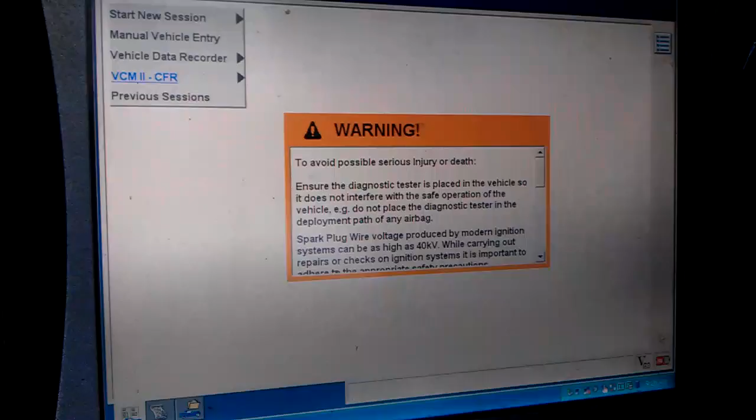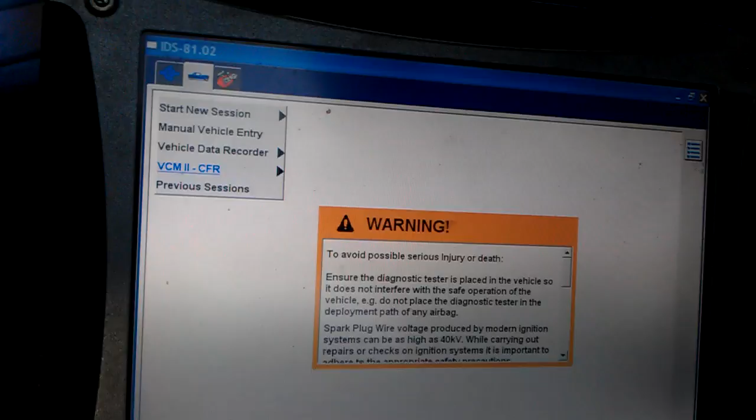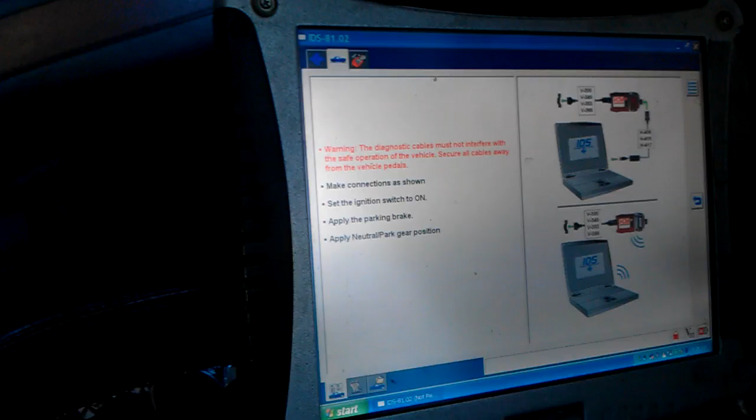Alright fellas, this is a video about how to check FICM power and see if you actually got a FICM going out. So first thing we do is turn the key to the on position and get it set up for the session. So it takes a few minutes. Usually when I do an inspection, I always check and make sure the FICM relay is alright.

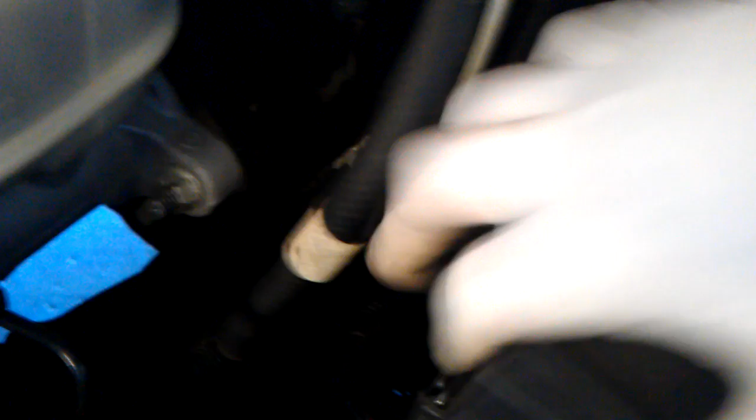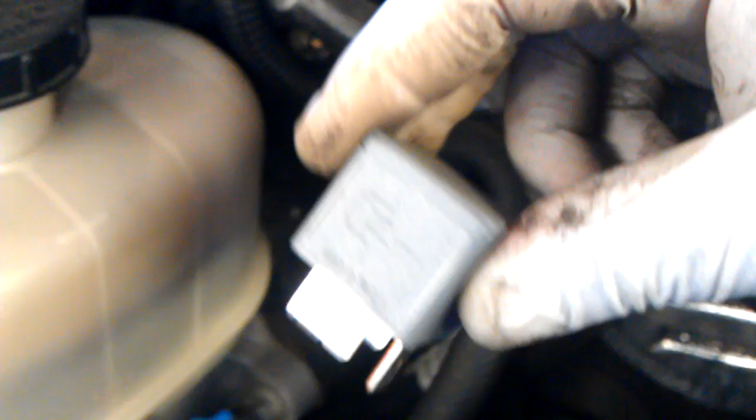Alright. Make sure these are alright. Wow, they're on there today. Yeah. What I'm looking for is some brown spots, like it's been overheated. But I'm not seeing anything at all, so it looked good. Here's another one. Alright, we want to check those, make sure those are alright. That could be your problem too, having low voltage. So, alright.

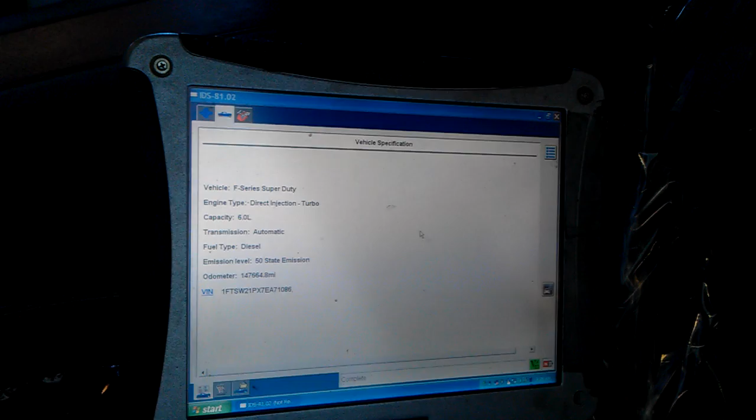So while that's hooking up, of course there's another session of it. This should be a pretty good video right here. If you don't have a scan tool, it's pretty hard to determine your FICM power and all that stuff. This is the IDS, what Ford is promoting for their vehicles. So, alright, so just check codes. That's the first thing I always do, is check codes. Powertrain, engine.

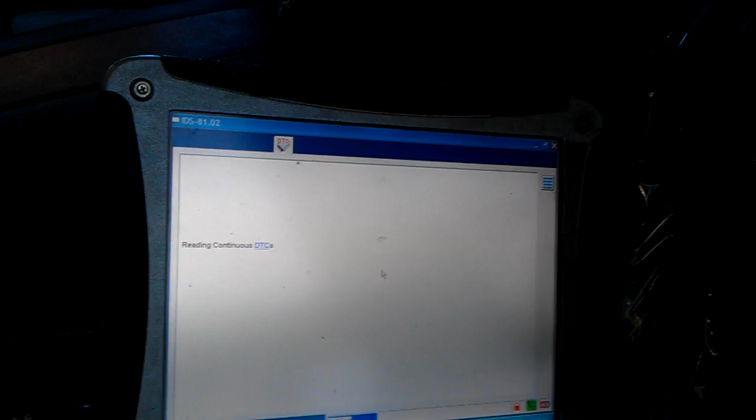Yeah, it's a nice cold morning this morning. It rained last night, so it's nice and fresh, crisp air.

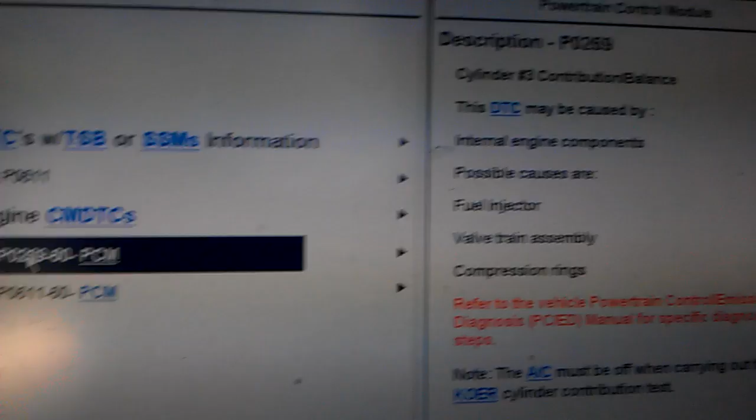Alright, so we have two codes. 611 is the notorious one for FICM, saying that the battery voltage is low. And the other one, 269, I think it's cylinder 3 contribution balance. Alright. So the next thing, I go to the toolbox, and then we're going to do the data logger, which shows all the PIDs. Go here, engine. As soon as I start it up, you'll know that it's misfiring and all that other stuff.

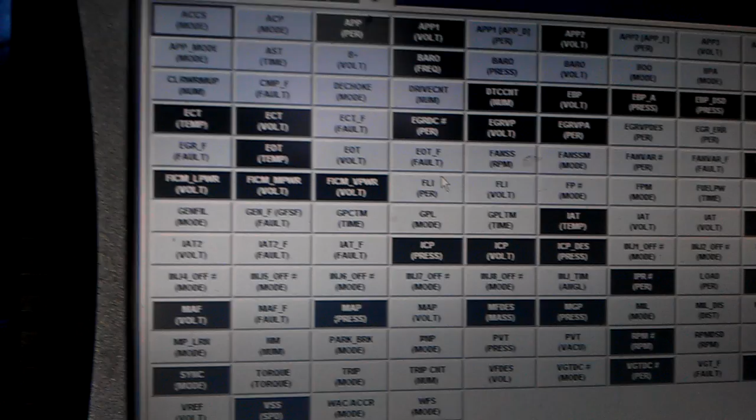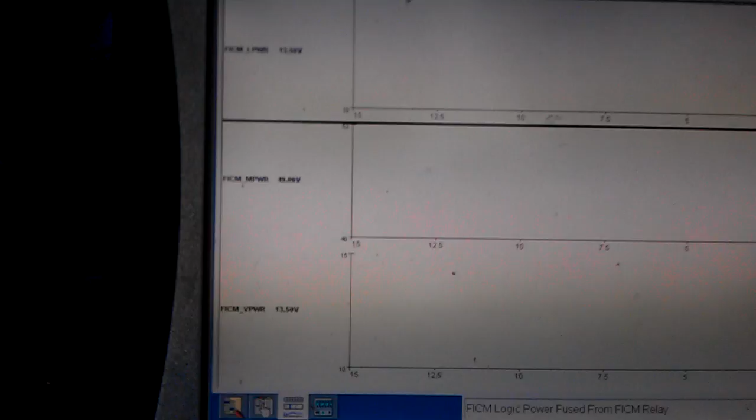Alright, here's all the PIDs. I'm sorry about the shaky video, I'm trying to do it one-handed. The ones that are black are already selected, so those are pre-selected every time you hook up a vehicle. So you usually clear them all. Then I just go to FICM. L power, M power, and V power. So click on that. It should give me the M power, 48.50. Alright, 13. So looking good.

Alright, let's see if I can do this one-handed. Alright, I want to start it up. Look at the M power. Dropping below 34 volts, 33. That's a good indication that the DC to DC converter is just junk. Time for a new FICM, going down to 30. It could stall out, but it'll probably just run for a little while.

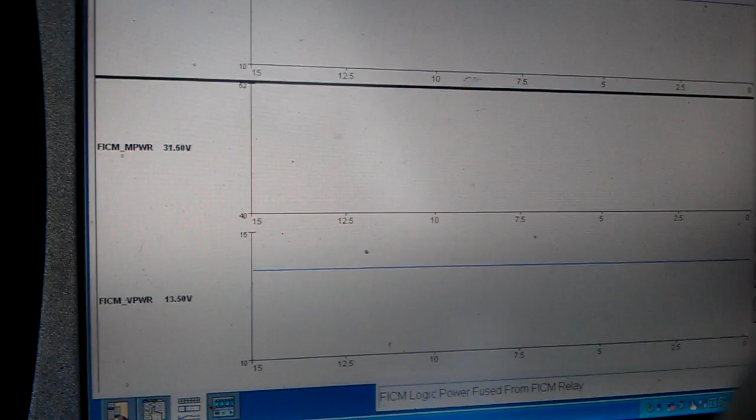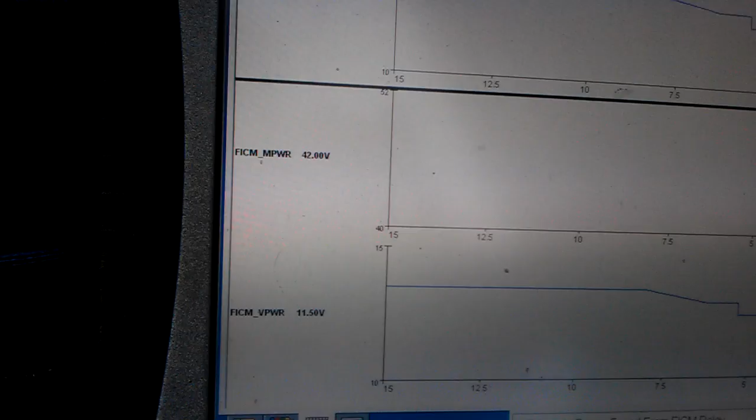Alright, so that's a good indication that a FICM's bad. And you can see the voltage just going right back up again. See, it wants to come back up. So that's a good indication the FICM is just completely gone. I get a lot of questions about, what about if it's at 45 volts or 46? It's perfect. Don't even worry about that.

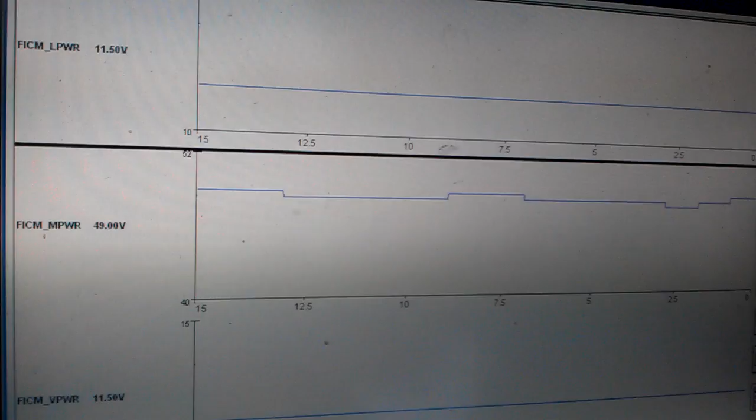Once it starts going below 45, like what you see here, it's definitely bad. I've seen them where they're 39 volts and it won't run rough like this one does. So there's numerous types of concerns out there, even though the FICM is bad. It's just the way it is. So now it's up to 49. So this thing has just had its time and it's ready to go.

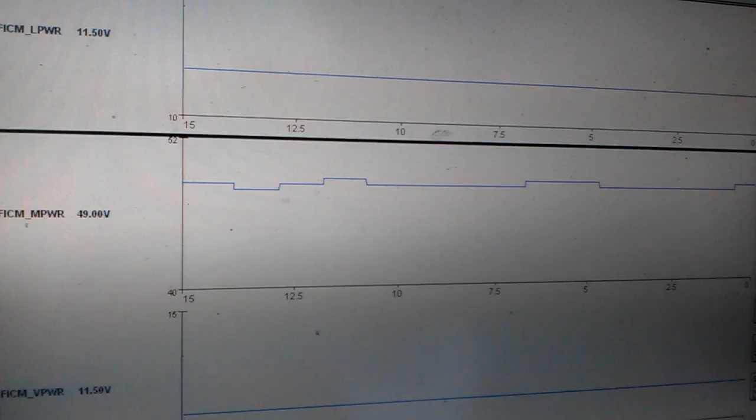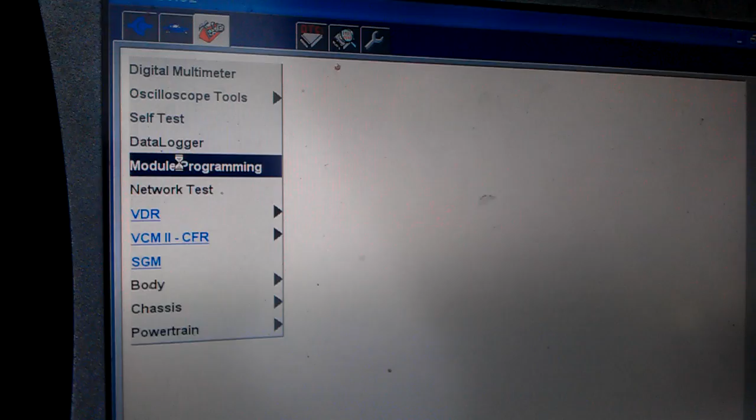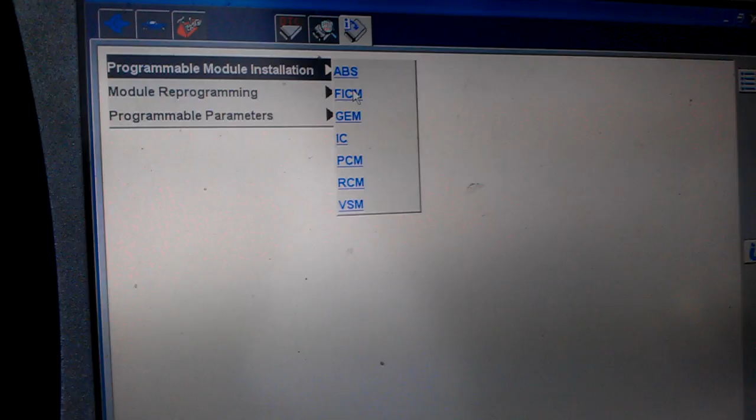So on the scan tool, once I get the okay to replace the FICM, then I go to module reprogramming. Right there. Oh, excuse me. Installation. Let's see, right there, FICM, and then it tells you to follow certain steps, but I won't do that until I get the okay. So other than that, that's pretty much it. How to diagnose a FICM.

I have seen the relays go bad and cause the same exact concern. That's the first thing I always check. And during the reprogramming, you're supposed to remove them. Also, there's a number 10 fuse, which is this one right here. Sometimes those blow. And I had a horror story about a month ago. There was a FICM that was actually cutting out, and it said no voltage. It was like a P0 something, like a 6 something, a different code.

And every time I banged on this, it shut off, and I was trying to figure it out. I thought maybe it was a loose pin on the relay or something like that. So I checked with the test light on both ends of the fuse, and there's power. But that doesn't mean that it's actually making contact. So I removed the fuse, and the fuse was actually broken, not blown, but broken. Every time I pressed on it, it made contact, so it looked like I had power at all times. So when I hit it or banged on it, it stalled out.

It took me about an hour, but you know, just the fundamentals, because you don't see that every day. That was once, maybe every few years you might see that. But when I learned electrical when I first started, the first thing they taught me is make sure you pull the fuse out, look at it, and even put an ohm meter on there and see if it actually makes contact, because it will blow you out, man. It'll just frustrate the hell out of you.

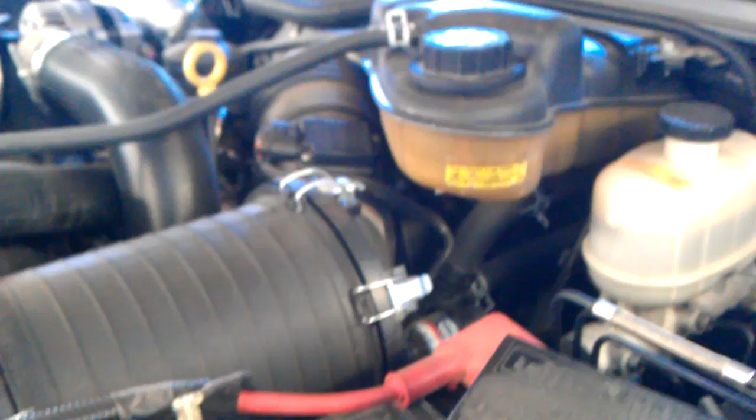So yeah, 6.0 fuel injector. Other than that, that's pretty much it. Usually on older vehicles or ones that really have high mileage, I usually just replace the relays as well, so you don't have to worry about that. So I just sell them all at one time.